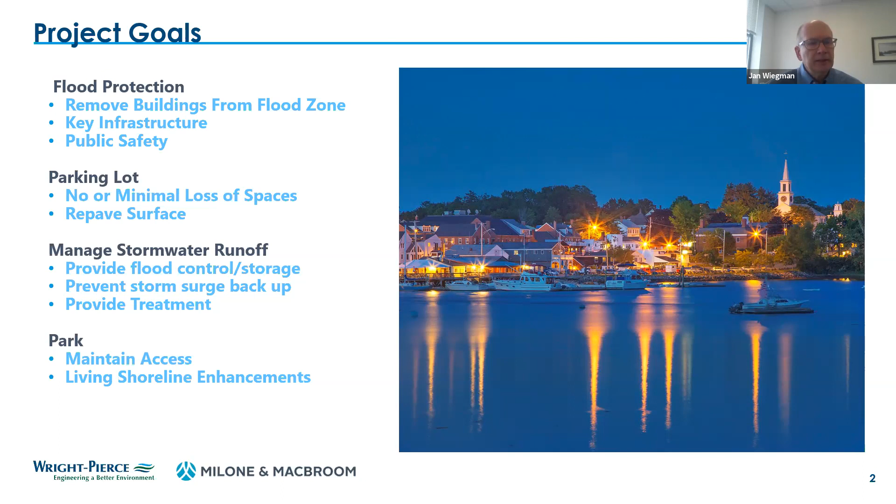So we wanted to prevent stormwater backing up and provide some level of treatment before it gets discharged to the river. And another ancillary goal here was to maintain or enhance the park where we could by incorporating a living shoreline and doing some other enhancements to the park, maintaining access to the park. It was an important element for the downtown.

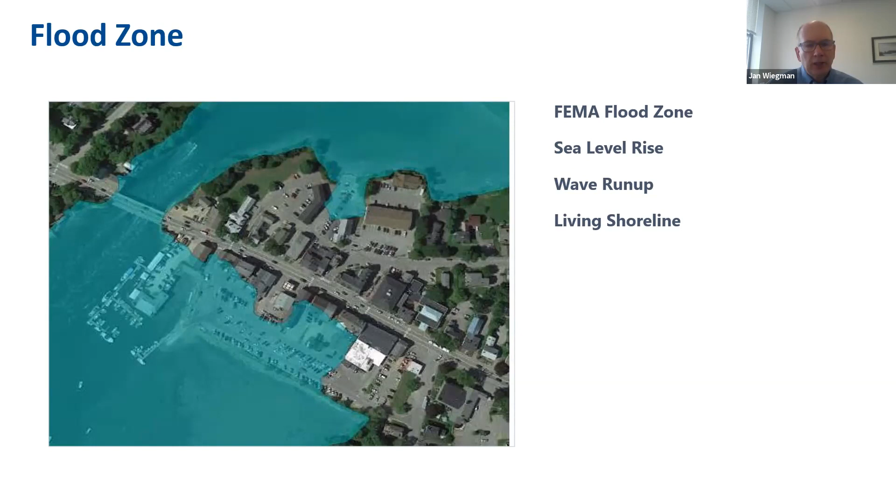So just to review, the flood zone is in the picture on your screen, and it shows the parking lot and the backs of several buildings being inundated or within the flood zone itself, the current FEMA flood zone. This is the current FEMA flood zone, and then there are other concerns related to sea level rise, wave run up, and what mitigating effects the living shoreline might have on that whole process. So those are all items that have gone into consideration in arriving at some of our design.

And this is a slide you've probably all seen before as well from our previous presentations, but I wanted to reiterate it because I know there was some concern over the height of the wall, and that being somewhat of a concern from an aesthetic perspective. And so I wanted to revisit this slide briefly to look at how we arrived at that 13.1 top of wall elevation for the current condition, with potential for the future to manage sea level rise to increase that to 14.6.

We worked with FEMA to both understand how their model was derived, where their flood elevations were at, what kind of factors of safety we needed to apply to various levels. We had wave run up. We have factors that the wall itself contributes to additional height because of being able to control waves as they hit the wall. And what we arrived at was a flood elevation of around 12.6 that we had to meet.

And then with concerns from sea level rise, we bumped that up to 13.1 for a commitment to manage sea level rise, which was the recommendation from the state. And then in the future, we looked at being prepared to manage a sea level rise that would take that elevation up to 14.6. And so that's kind of how we arrived at the particular wall configuration.

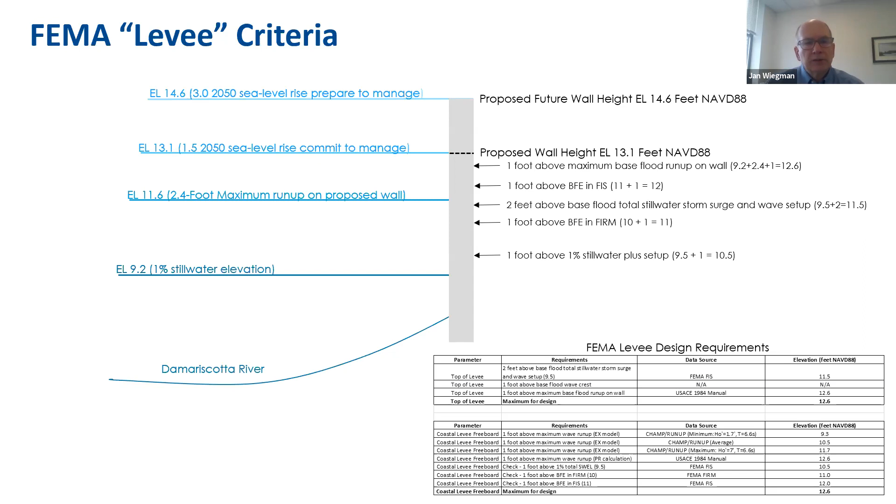Another component here was park improvements. The last time we met, we had discussed several different alternatives, and there was a pretty strong preference for alternative 1 or A that we presented, which was more of a natural type living shoreline with, you know, not as much hardscaping and so forth.

The other thing we had discussed the last time was an enhanced stormwater management system. So we had conducted some modeling showing what would happen if there was a 100-year rainfall event at the same time that the river was at a 100-year flood elevation. And we looked at how do we accommodate storing that excess landside water, fresh water, until we could discharge it through the storm drain system. So we developed an underground storage system. We had also looked at pumping as an alternative as well.

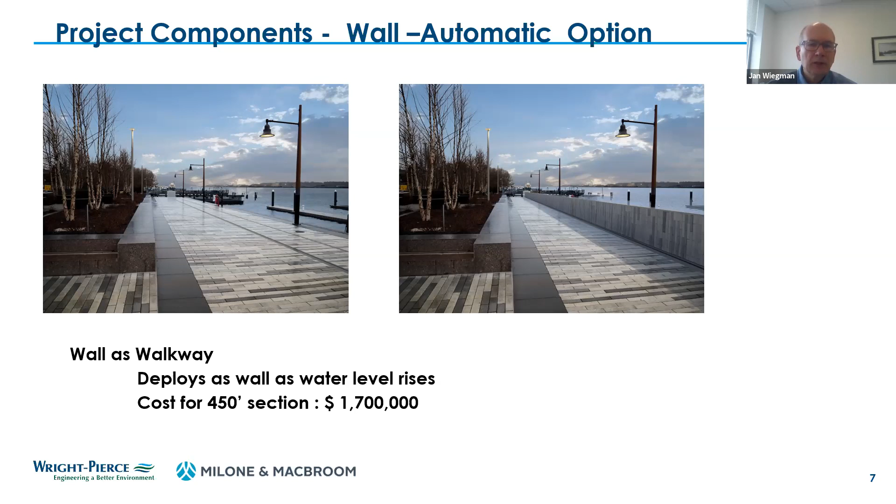And so we looked at this automatic system. That's the same system essentially as we just showed you for the walkway that could tilt up. And these are gates that you can drive over, and they're activated by water pressure. Hydraulic pressure from the rising water lifts them up. They float in the upward position. The vehicle openings would be about $150,000 for each of the vehicle openings, and a pedestrian opening is about $30,000.

Then we also looked at large swing gates. These are hinged. They remain in place and can be deployed relatively rapidly. When you knew the flood is coming, you'd have to send somebody out to close the gates essentially. And for the vehicle opening, those are about $48,000, and for a pedestrian opening, it's about $22,000, depending upon the width.

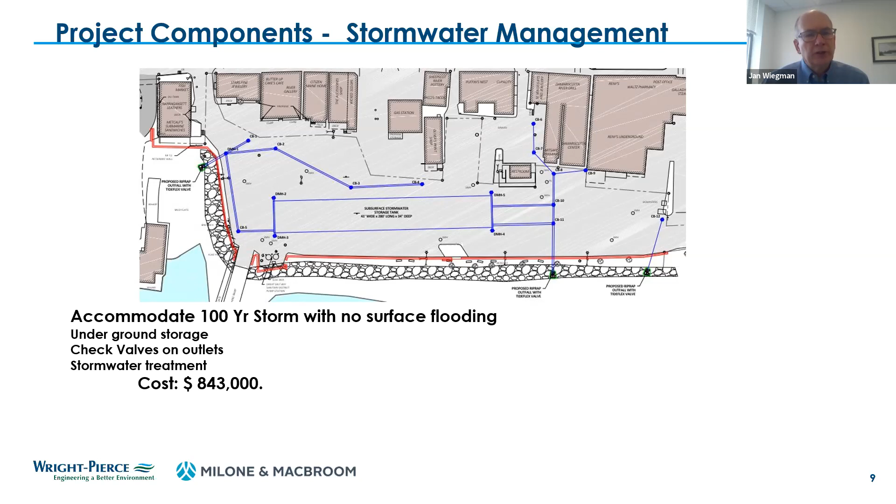So those low flows, which is where the bulk of your pollutant loads come from, would be treated through a filter system, which also requires ongoing maintenance. And then we had looked at rebuilding the parking lot. We were looking at removing the pavement, replacing some of the gravels underneath to create a better base, and then repaving with 4 inches of pavement and striping. So the cost for that particular component is about $800,000 for that scope of work.

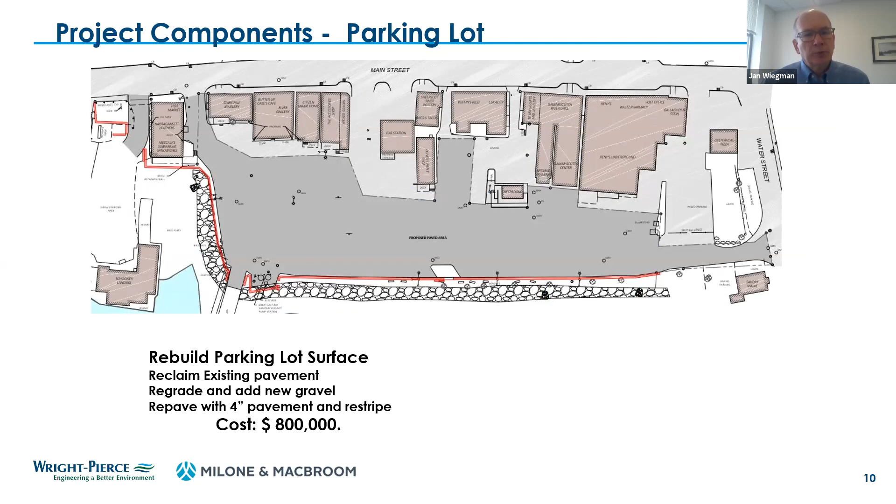Then we looked at park enhancements, and what we looked at was doing some work on the revetment that we have there within the existing riprap edge, creating some opportunity for planting areas, and also creating walkways and planting areas within the revetment areas to create the living shoreline. And then there were a number of components for the park itself with seating, seat walls, benches, chairs, flagpoles, kiosks, other things that would enhance the experience there, as well as some additional landscaping. And the cost for that particular piece was about $220,000.

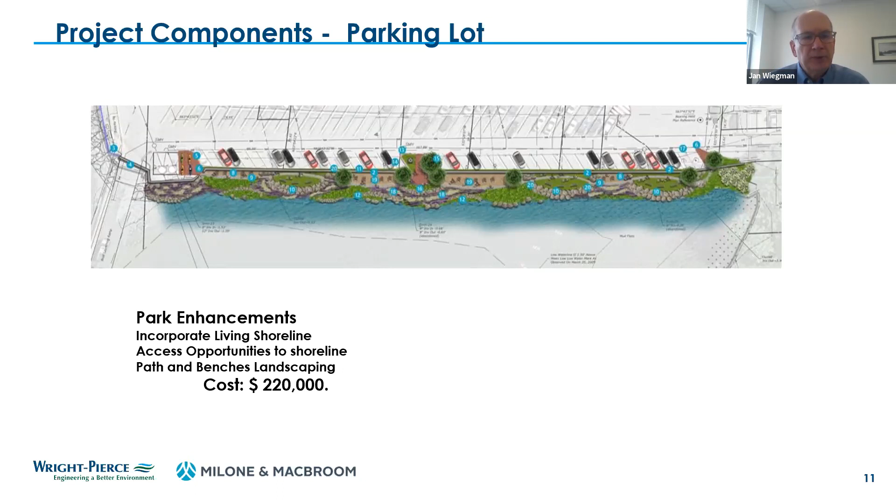I don't have a lot of pictures, but I do have some suggestions, and I'll run down through the bullet points. So for the wall, what we looked at is doing just a straight sheet pile wall with a cap on top and no facing on it, thinking that in the future that sheet pile wall could be enhanced with other projects or in some other ways. The sheet pile itself is a roll form section, and because of the location against the salt water, there is a coating on it. So just so you're aware of that.

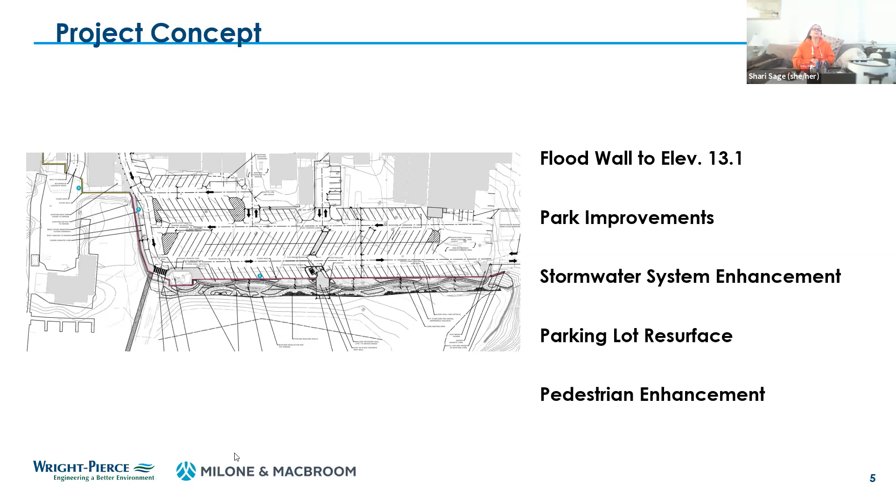So, Shari? Has anybody from the fire department come out and taken a look to see, for those buildings on the west side, how they would attack an aggressive fire? It doesn't look like there's a lot of alleyway or walkway to really approach these buildings. And I could have sworn a while ago somebody said one of these ideas didn't even offer at least a foot of space between the building and a wall. So I wondered if we've had any fire department feedback.

I've talked to the fire department about it. They still have full access to both sides of the Leather building and to Schooner's Landing under any of the scenarios we've talked about. Okay, thank you.

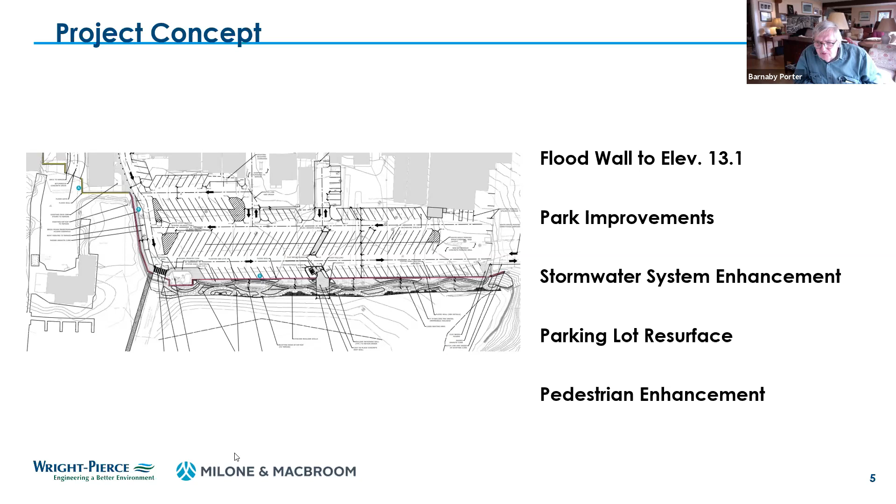Can we briefly go back to the discussion of the sheet piling extending above ground and its durability or longevity? In the first drawing that we looked at of those three, I'm not sure if the concrete is sitting on the top of the sheet piling or if it extends basically to the top of that concrete, which looks like the case in the other two drawings. But my question is whether being embedded in concrete will extend the lifespan of that sheet piling by not being exposed to the elements.

I mean, if you can sidestep having to do some major upgrade in 30, 40 years, it might be worth the extra cost now to go to at least that length there. I mean, 1.6 million is a hell of a lot of money, but it's a big and important thing that we're doing. And that wall is really about the most important thing.

Those are my thoughts, and that's my question: what embedding that sheet piling in concrete will do to the longevity of it. I think the difference of the options is that it does encase it and not expose it to daily salt air and salt water spray. So the longevity of it clearly is enhanced from that aspect.

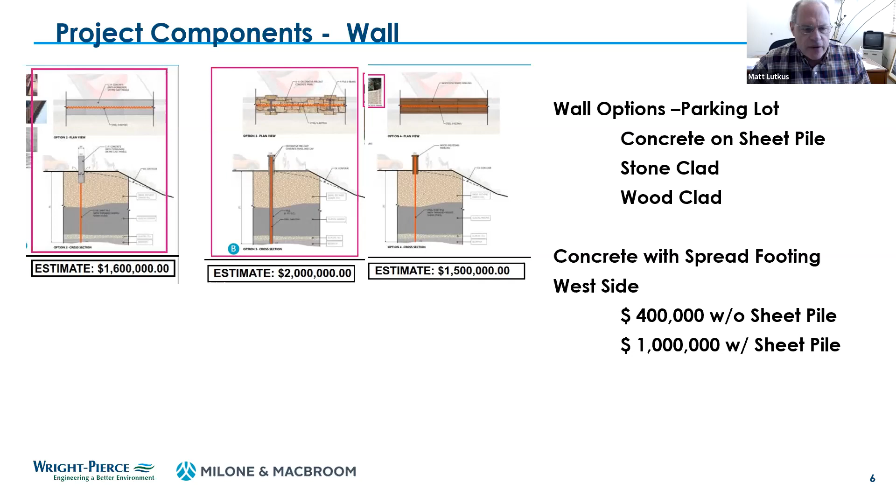To get the perspective of the committee, could we do some level of prioritization? Jan, if you could go down to that last slide that showed the bare bones option chart. From my standpoint, when I try to get additional funds for this project, it would be helpful for me to know what the priorities are from the committee. I guess probably a high priority would be, if we're going to build that wall, to build it so it looks halfway decent, either with a concrete face or stone facing.

Here are comments on the stormwater management. In our ideal situation, we're able to accommodate the runoff from a major storm as well as the tidal rise. But based on our prioritization, that may be a lower priority than some of these other items. So I'd like to hear some feedback on what on that list you see as the priority, and what additional items should be added if we had the funds.